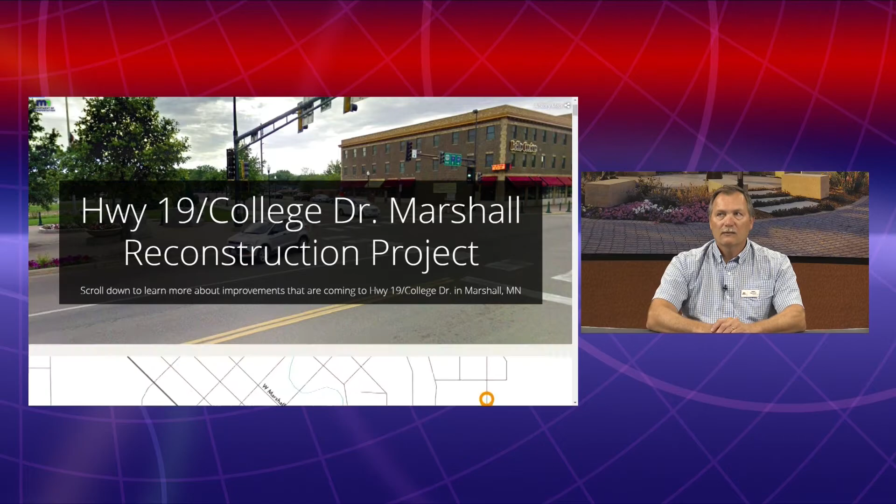This project starts at 4th Street and goes to Bruce Street. It's the reconstruction of Highway 19. We will have roadway improvements, intersection improvements, improvements to safety, and improvements for people who walk and bike. We will replace the city utilities and make improvements to drainage. We've analyzed each intersection on Highway 19 College Drive and added community priorities to each.

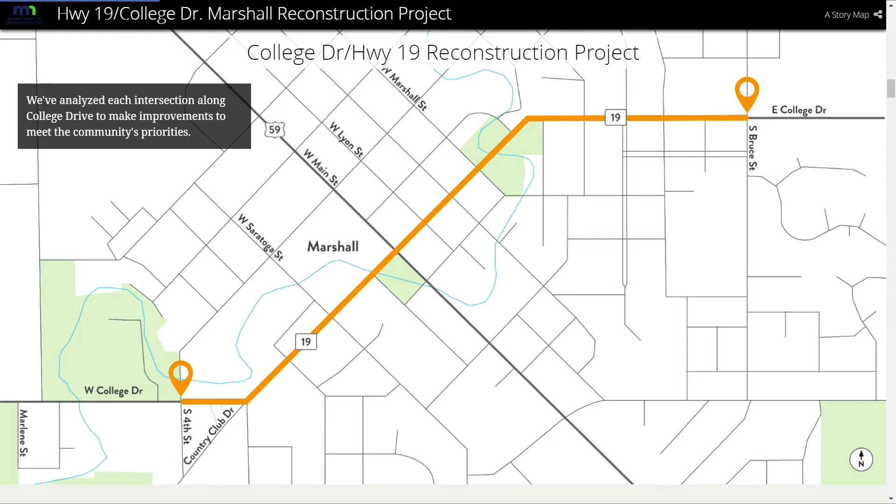At the intersection of 4th Street, we have added bump outs to reduce the distance for pedestrians to cross Highway 19 and 4th Street. The bump out brings pedestrians closer to the travel way and makes them more visible for traffic, and also makes traffic more visible for pedestrians to aid in decision making when crossing the street.

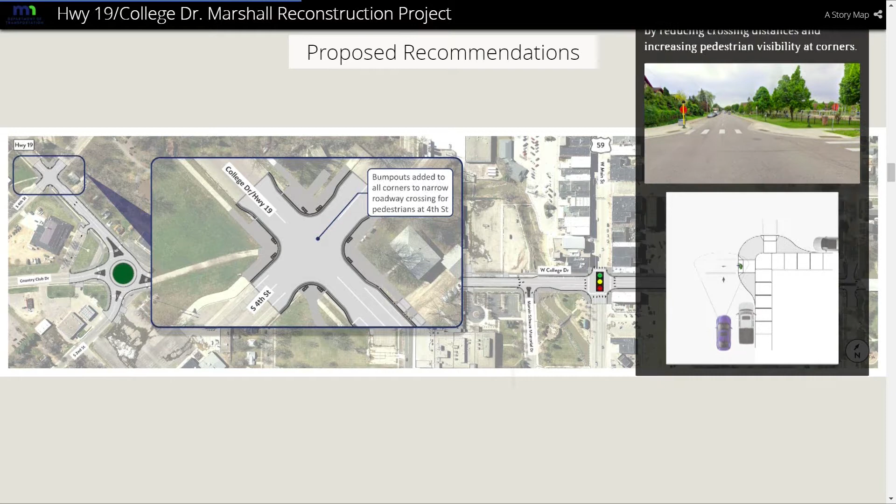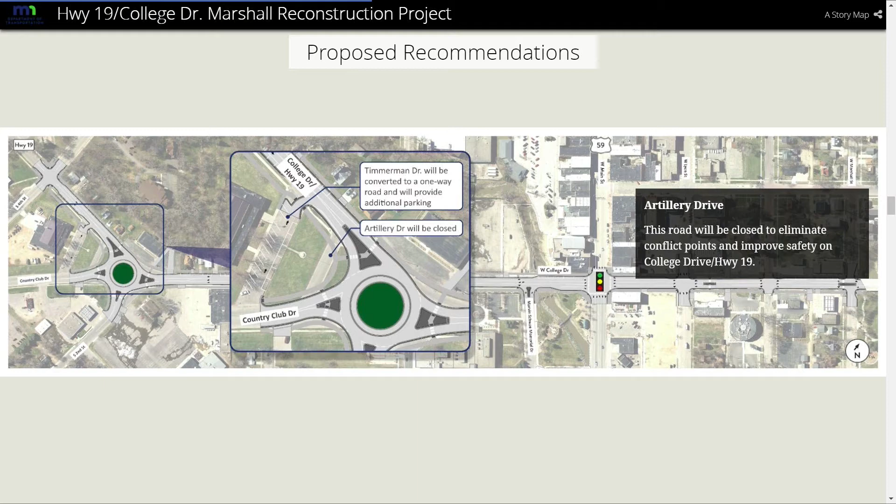Moving to Timmerman Drive, it will become one-way, and we will add additional parking to help facilitate the parking needs at the Armory. Artillery Drive will be closed, and a roundabout will be installed at the intersection of

Country Club Drive, 2nd Street, and Highway 19. A roundabout really helps with traffic calming. When I say traffic calming, I'm talking about helping slow traffic down to move through there, and also helping facilitate the traffic flowing freely through that intersection.

It makes it much safer for pedestrians to cross. When pedestrians cross, they have the ability to cross one lane of travel at a time, then seek refuge in the splitter islands, and make their second movement to cross again. It also pulls pedestrians out of the turning area, so as traffic comes up, they can see the pedestrians crossing, then move forward into the roundabout and make that turning movement without any problems or conflicts with pedestrians.

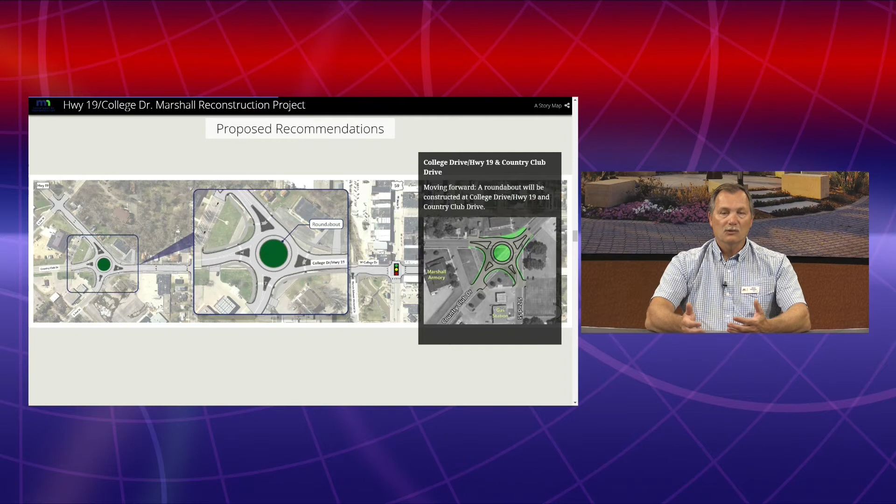We've looked at other intersections with maybe stoplights or something like that, but when a car pulls up to a stoplight, they're not only stopping traffic, they're also focused on the light, looking to see when they should make their next move, and not paying attention to the pedestrians trying to cross as well. So the roundabout really becomes the smoothest and best option for this intersection.

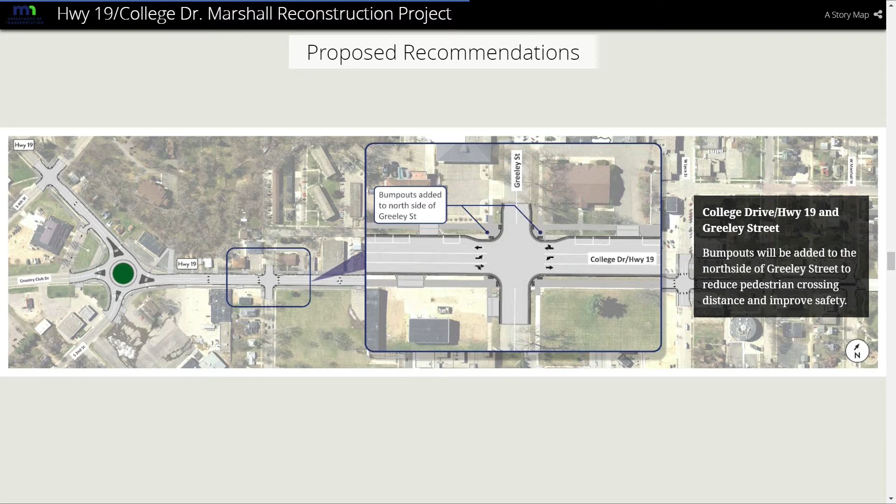Moving on to Greeley Street, we will add some bump outs to the north side of the intersection to help reduce the distance that pedestrians need to cross.

At Saratoga, it'll remain a signalized intersection. We will add bump outs at one of the corners to help reduce the distance pedestrians have to travel. The dedicated right turn lanes currently on Highway 19 will be removed and just be a through arrow on those lanes, but traffic will still be able to make a right turn as necessary.

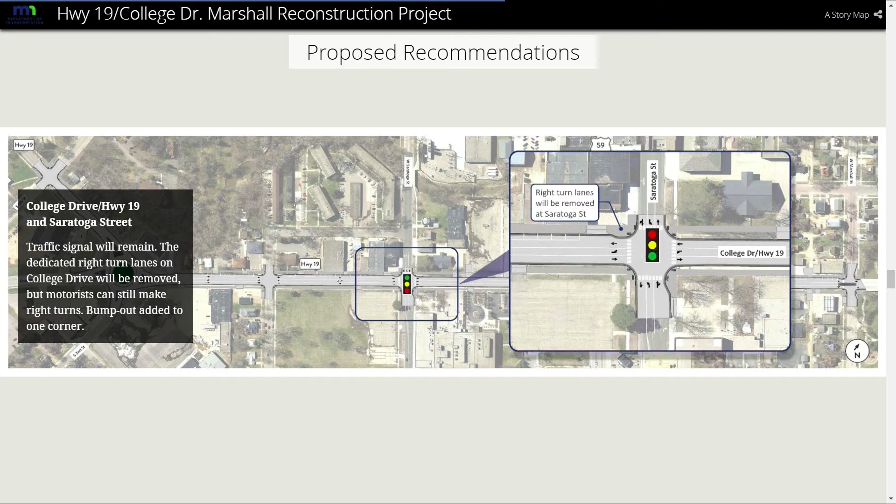Moving to the Marvin Swan intersection, we've made this a right-in, right-out with a raised median. By doing this, it helps us gain additional storage for the left turning movement onto Highway 59, or Main Street.

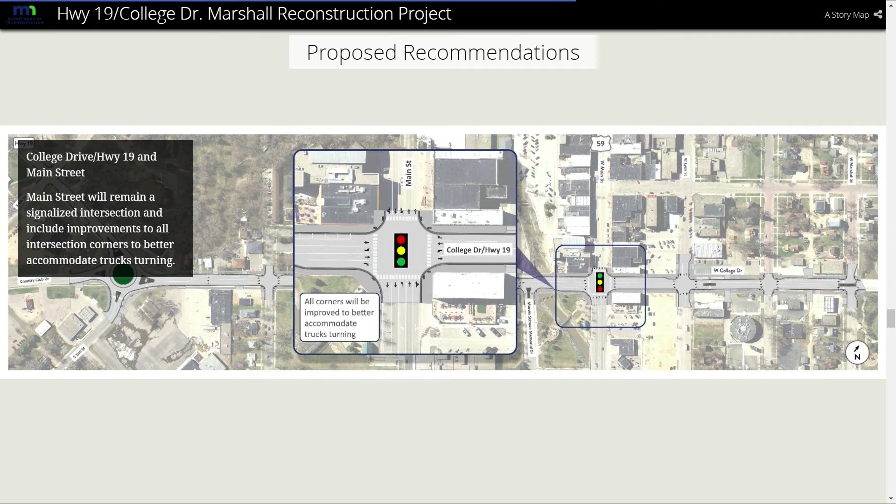Moving to Main Street, we will make the radiuses a little better to accommodate truck turning movements. It'll remain signalized, and we will also be removing some parking in this area and placing wider sidewalks to help accommodate the pedestrian curb ramps and allow pedestrians to use this area a little better, a little safer.

Moving to the east, we come to Lyon Street. The signal will be removed, and stop signs will be installed on Lyon Street. We will also have some bump outs at this location to help facilitate pedestrians crossing.

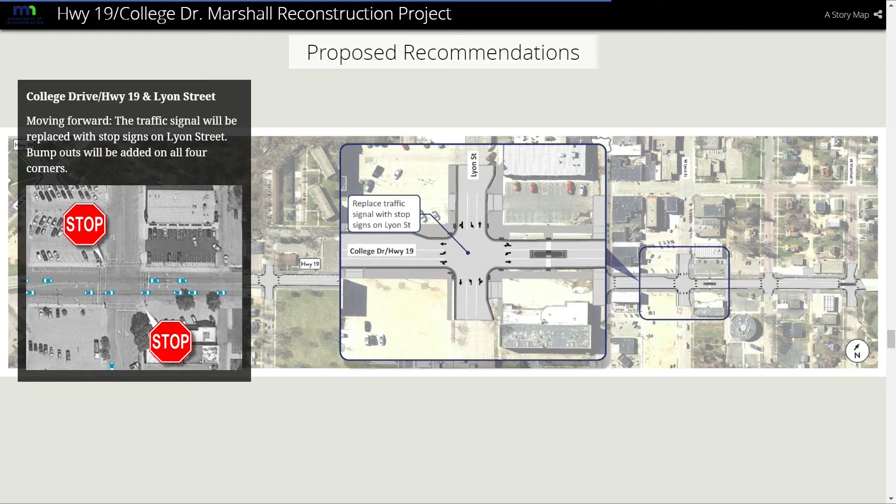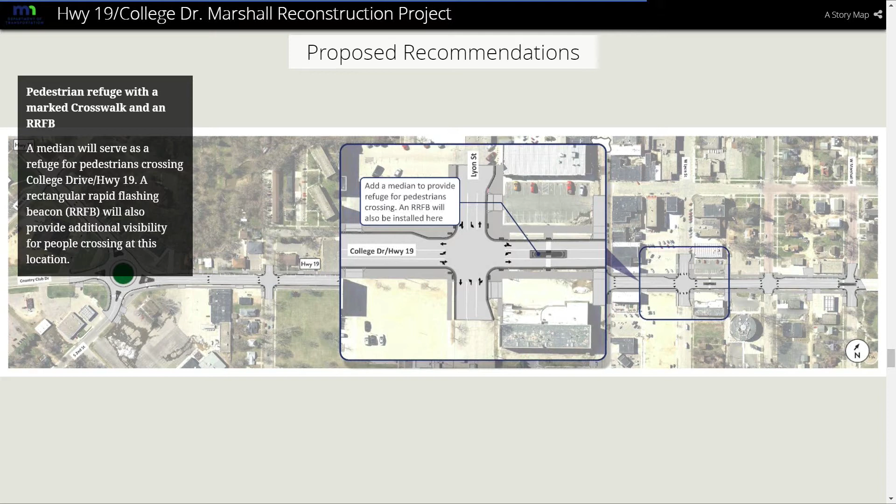Moving a little further east, we have a raised pedestrian refuge, or raised median, with an RRFB. An RRFB is a rectangular rapid flashing beacon that helps notify traffic that there is a pedestrian trying to cross at this location. As you can see in the slide, it would look something similar to this, where a pedestrian only needs to cross one lane of travel at a time, and it also helps calm traffic by slowing people down.

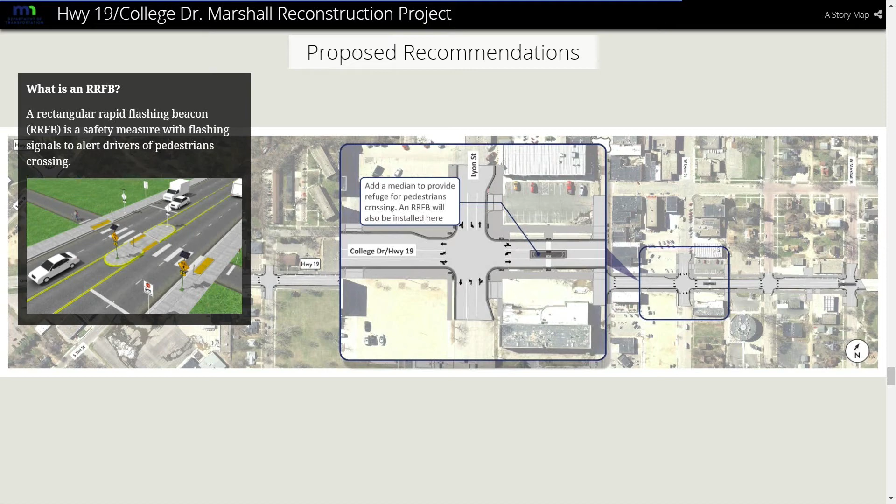Moving further east, we come to Marshall Street, where it will now become a right-in, right-out only. We will add a raised median there, which will also aid with pedestrian crossing, and add bump outs to help shorten the distance of pedestrian travel. The bridge at this location will remain. It is a historic bridge and will stay as is.

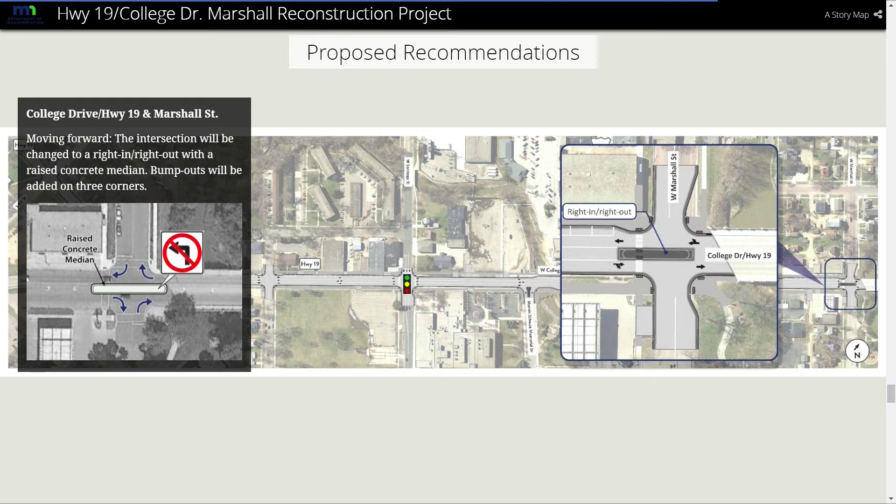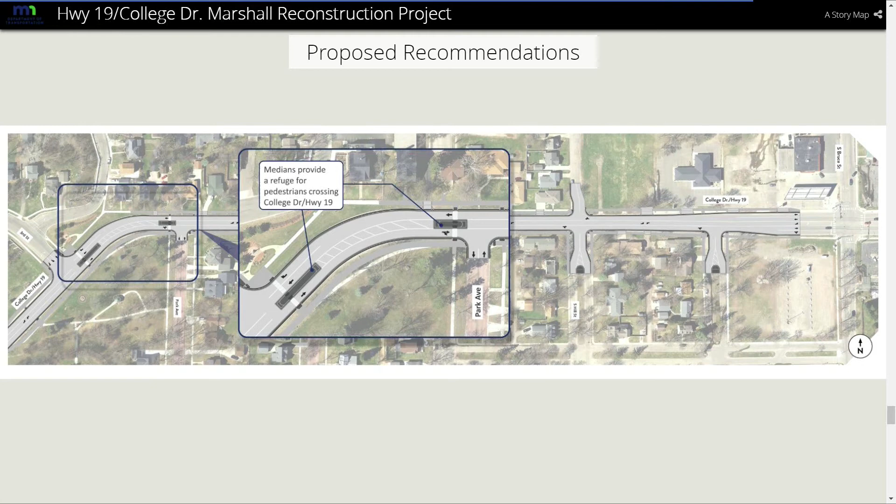Moving to 3rd Street and Park Avenue, additional raised medians at this location will be installed to help facilitate pedestrian travel through this area, as well as help with traffic calming to slow traffic down and help them navigate this curve.

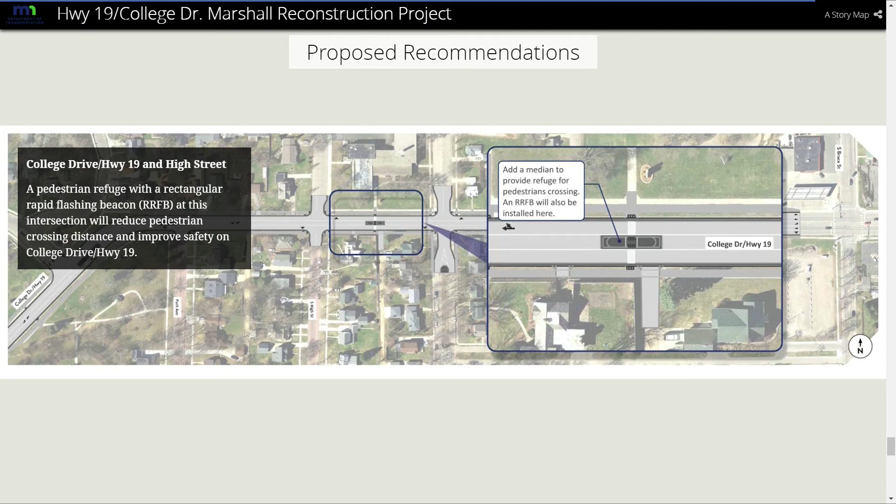Moving east again, we come to High Street, where at one time we did a demonstration project right next to High Street with a raised median and pedestrian crossing area. With the demonstration project, we found it was not necessarily a good location for that raised median and RRFB,

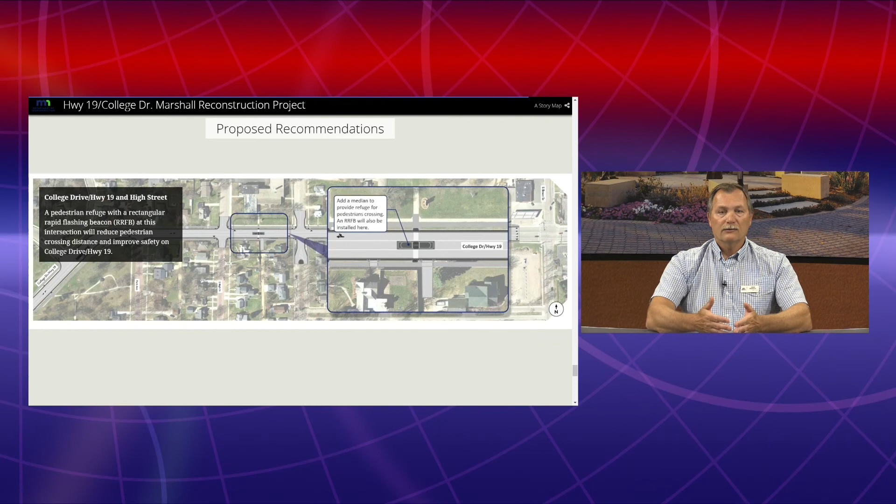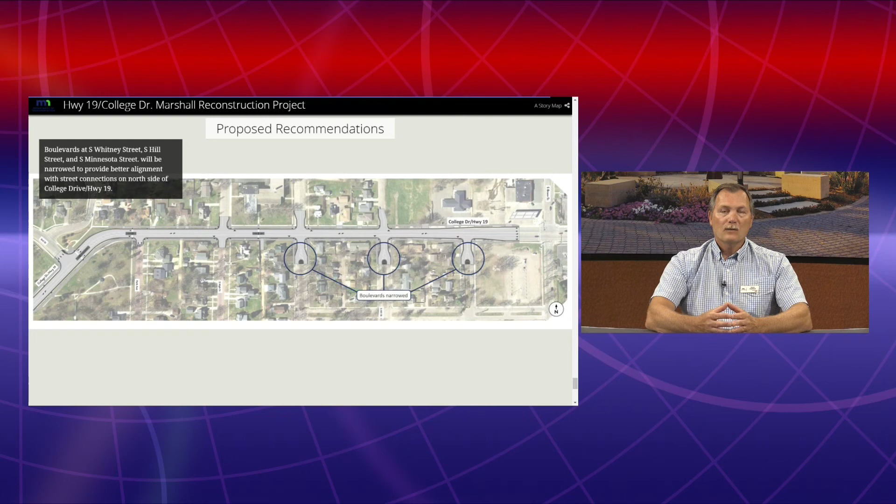so we have now moved it to right in front of Grace Life School, where the city will have an RRFB installed, I believe, in the year 2022, and we will install the raised median in 2025 with the reconstruction project.

Continuing east, we have Hill Street, Whitney Street, and Minnesota. We will take these intersections and line them up a little better with the roadways across. We will reduce the boulevard widths, which will also help with turning movements at these locations, and we will eliminate the parking right at the beginning of the intersection.

And then ending with the construction just shy of Bruce Street.

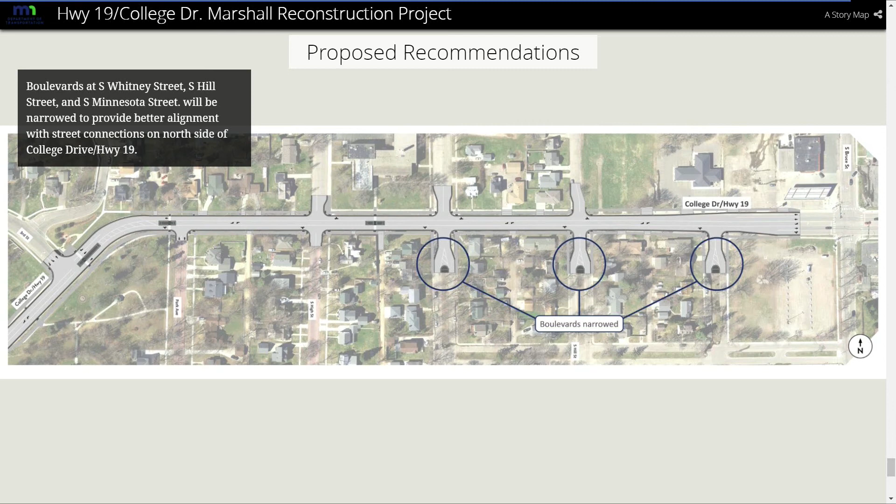The next steps: the city is having a public meeting on August 24th to approve the layout. Once the layout is approved, MnDOT will continue on into the design phase of the project, finalizing and detailing the design, and then 2025 and 2026 would be the construction of the project.

If you have questions or comments, please visit the website where you can see the layout and leave a comment. You can also find my information there, where you can get a hold of me to talk about the project. Thank you.